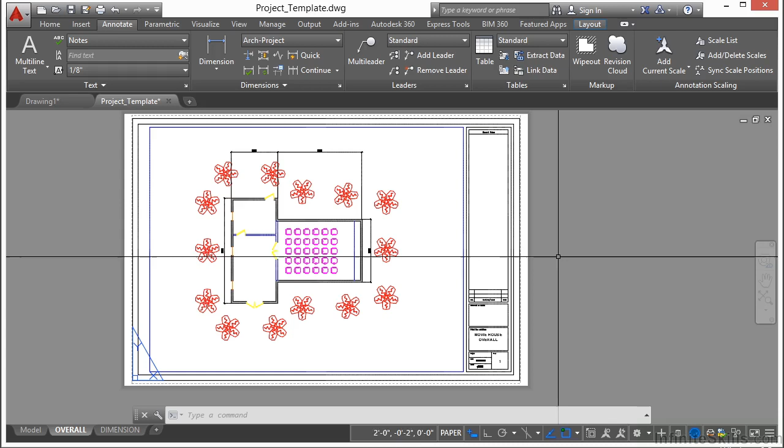So we've created our model, put in our accessories and plants, and created our first drawing. Now let's create our second and last drawing. The DIMENSION tab is already here for us, and we're going to draw in some dimensions.

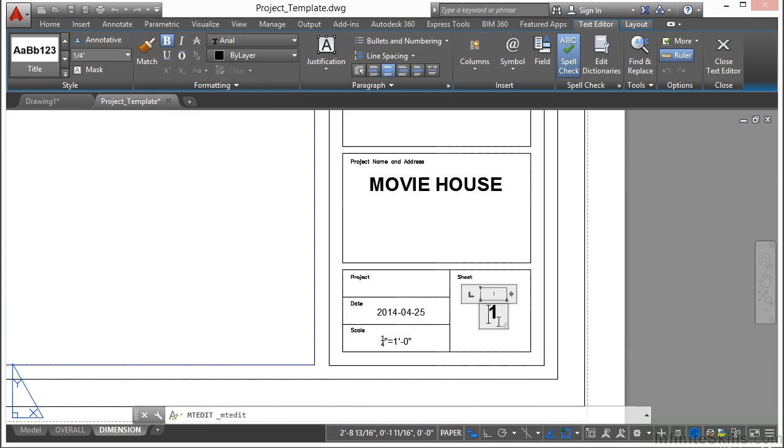Now there are a few things I don't want to show in this drawing, but before we start, I'm going to change this, double click the text, delete the number 1, and make this sheet number 2.

Activate this viewport by double clicking inside it. Go to the Home tab, Layers panel, click on the snowflake to freeze layers, and let's freeze the plants, the footing layer, and these chairs. I just want to dimension the location of the doors, windows, and walls. Double click outside of that viewport to turn it off.

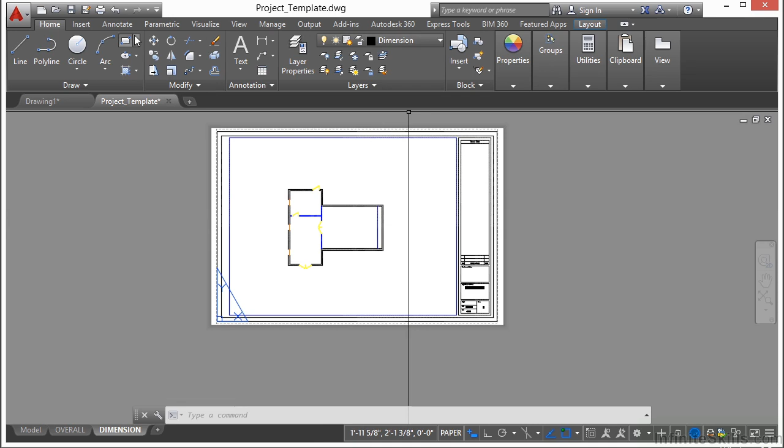Now we're on the dimension layer still, so that's fantastic. We'll go to Annotate and the dimension. So we're going to create a few dimensions here. Let's start on this outside wall. Select there and dimension to our window, 4'10".

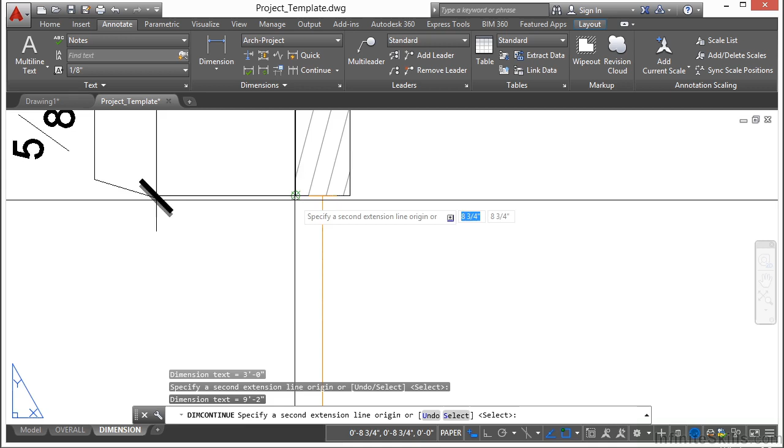Now we're going to continue, and it picks up where we left off. Click that point. We're going to go all the way down the wall. I'm just zooming out, panning a little, then zooming in, repeating that as needed. When I'm finished, I press Enter, then press Enter again to fully cancel out. Now we've located all of the doors and windows for that side of the wall.

Let's put in an overall dimension. Start the dimension command again. Click on that same point, click on this endpoint, and put that dimension in there.

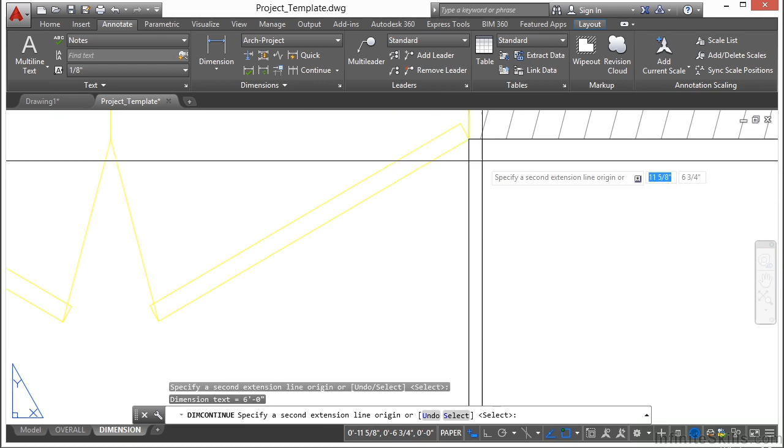Let's do something similar here on the bottom. Start the dimension command again, dimension to the door, and then continue. There's that one. Now let's do the top. Dimension to that point, the first part of the door. Pull your dimension up here and continue.

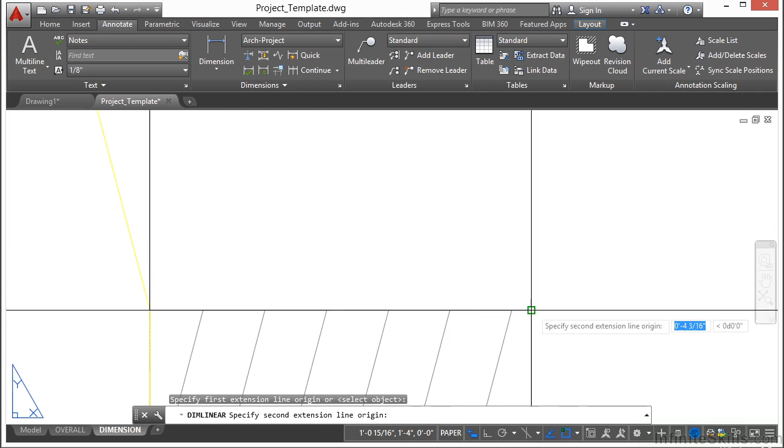Now you can see here we're repeating a lot of the same steps over and over again. That's okay. Start the dimension command, click here, and we want an overall dimension of this section. Bring that up and let's continue on, and let's locate the end of that wall.

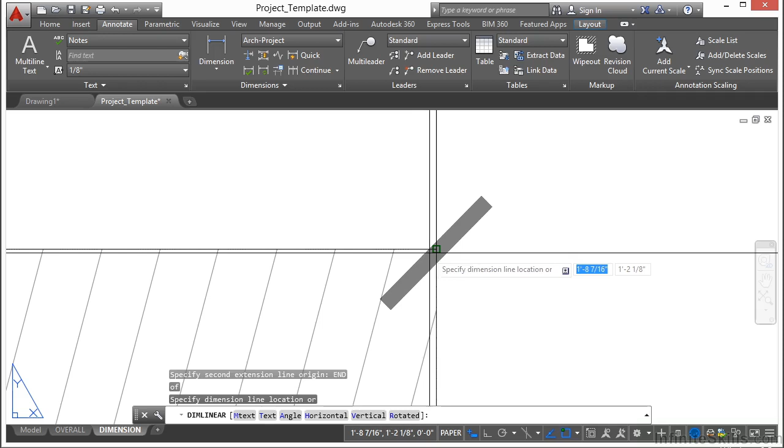Now I want to put an overall dimension for the entire length of the building. Start the dimension command, click on this endpoint here, then zoom in down to there and click on the endpoint here. If you have any trouble with your O-snaps getting to the right snap location, don't forget you can manually type them in. Put that dimension right there. Perfect.

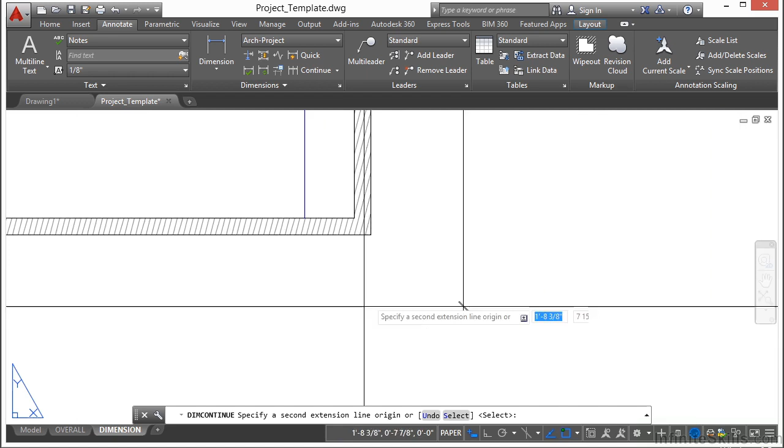Let's put in this dimension here now. Dimension to that endpoint, dimension to this endpoint, and we're going to stretch it out to the right. Continue down, snap to there. Fantastic, so that's all of our external line work that we have dimensioned out.

Now we need to do some of the internal dimensions, and we're nearly complete. Start the dimension command again. Pick that endpoint, and just pick up here, parallel's fine, which locates that wall for us. Let's locate this wall here, snap into these endpoints. Now we know where that is.

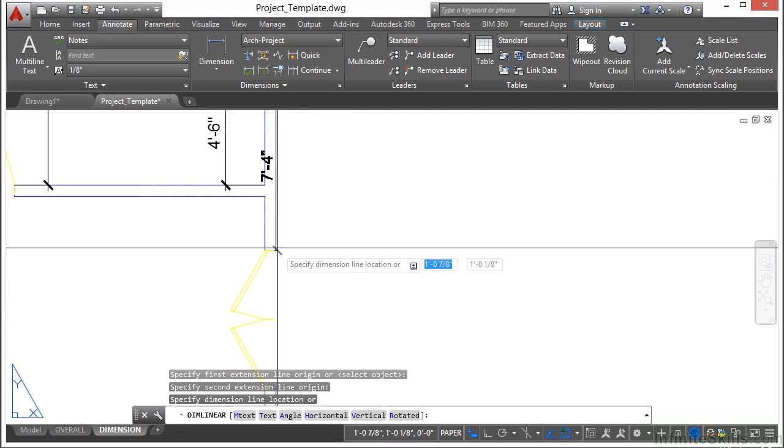And we need to know where this door is here as well. So we're going to start from this point, click to that point, stretch out our dimension, continue on, and dimension the doorway.

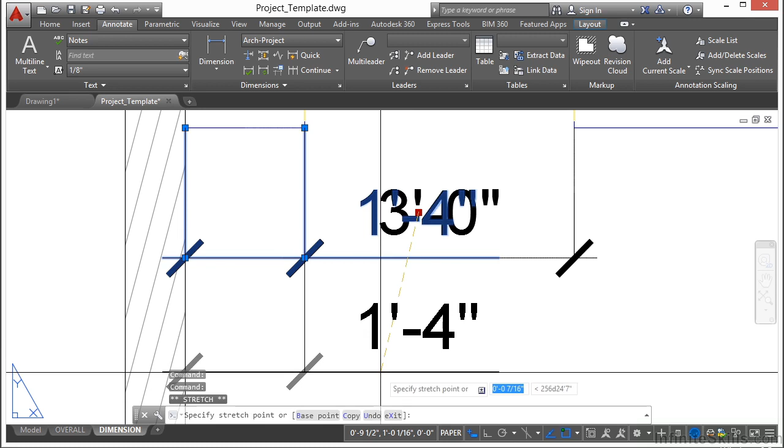Now we need to locate this last door. Start the dimension command, dimension this section here, then continue on, dimension there, and press Enter, then Enter again to finish. Now I see here that this dimension is kind of in the way, so we're going to stretch it down that way and stack it. Now we can see it.

Last thing we need to do is dimension where this line is at. So I'm going to grab my dimension command, pick this endpoint, pick a parallel point, and we have the 27-foot 6-inch dimension. So here we are.

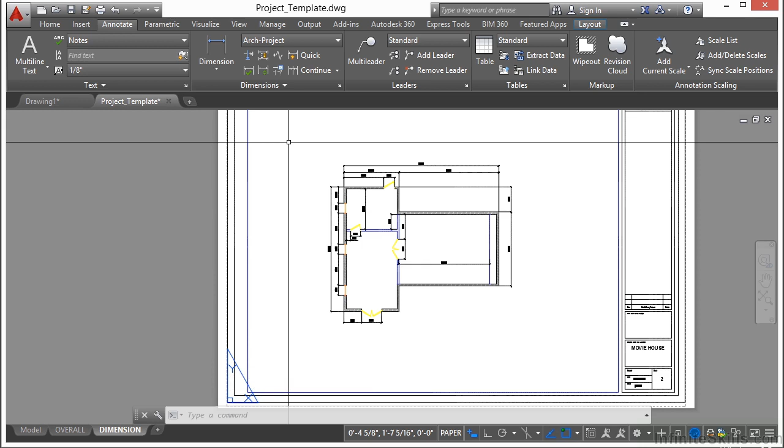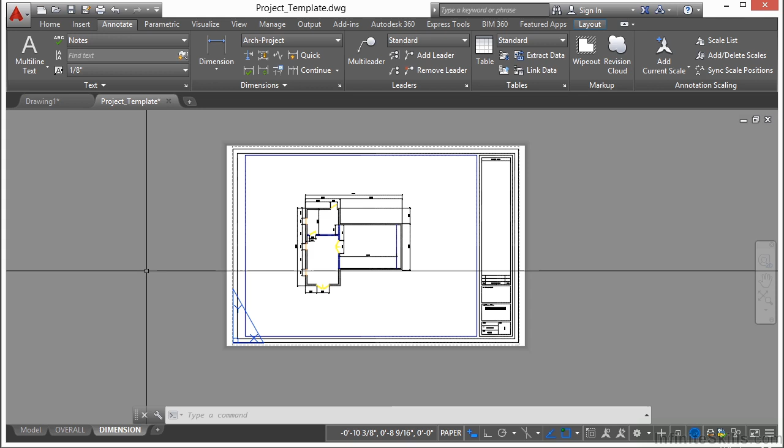We now have our fully dimensioned model. This gives us all the information that we need to draw these walls, locate the windows, and the doors. Now we have a full set of drawings: a nice overall site plan and a fully dimensioned set of drawings as well. Both have been title blocked, labeled, and have a drawing number in them. And that is essentially how you make a drawing in AutoCAD.